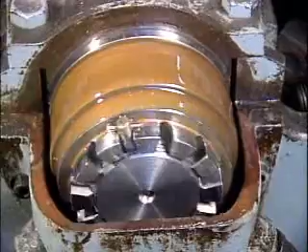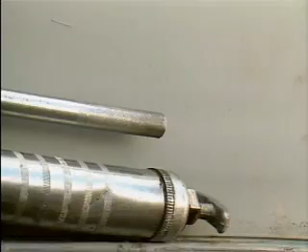A thin film of lubricant is the only thing preventing metal-to-metal contact between the many moving parts in your facility's equipment. If the lubrication fails, expensive machinery can be destroyed in seconds. One of the most widely used types of lubricating devices is a hand-operated grease gun.

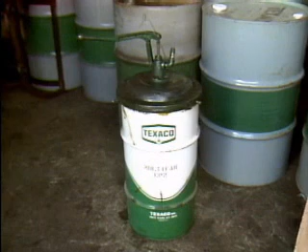Many grease guns can be filled directly from a drum through a fitting. These are called bulk load grease guns because they are filled directly from a bulk supply of grease. Grease is pumped into the gun with a device called a grease gun filler. The filler is often simply a hand pump that is installed on a grease drum.

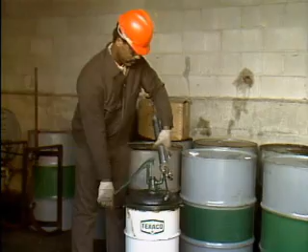The outlet of the hand pump is attached to the fitting on the grease gun and the handle is pumped. When you start to feel resistance to pumping, the gun is full. The cap should always be replaced. Other types of grease guns are filled by replacing cartridges.

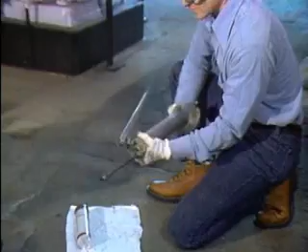The top of the gun is unscrewed, and then on this gun, a plunger at the end is pulled back and used to push the empty cartridge out. The plunger is pulled back and locked in position to make room for the new cartridge.

This new cartridge is opened by removing a plastic bottom cap and a metal pop top. It's placed in the gun barrel bottom first, and the top is screwed back on. To finish up, the plunger is released and shoved all the way in.

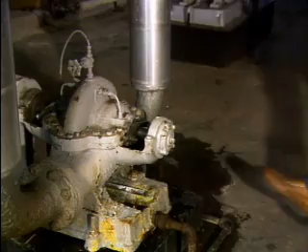Once a gun is filled, it's used to pump grease through a fitting into a machine part. Most of the time, that will be a bearing in a housing. Before lubricating a bearing, it's always a good idea to check it to see if it's running hot. The simplest way to do that is to feel the housing.

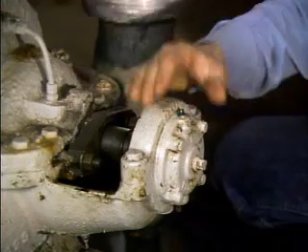You may want to try it with a glove on first. If it doesn't feel hot, you can check it with your bare hand. A hot housing is a sign there's too much friction, possibly because there isn't enough lubricant or the wrong lubricant was used. A hot running bearing should be reported for maintenance.

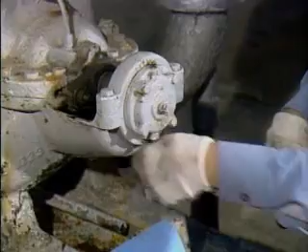Many bearing housings have a drain hole to let old grease out. The plug in the drain hole is unscrewed before new grease is added. It's important to use a clean rag to wipe off the grease fitting so dirt won't be pumped in. The tip of the gun is placed over the fitting and grease is pumped in.

On a bearing with a drain plug, the gun should be pumped until the old grease is forced out. In most cases, the new grease will be a slightly different color, so watching for a color change is one way to tell that the old grease has been forced out.

Sometimes, however, the old grease mixes with the new and it's hard to tell them apart. In that case, you may have to estimate when the old grease has been forced out by the amount that's come out. After adding grease, the drain hole is wiped off and the plug screwed back in.

If the bearing isn't turning during greasing, plant procedures may require the machinery to be turned on for a few minutes before putting the plug back in. That distributes the grease in the bearing and forces out any excess.

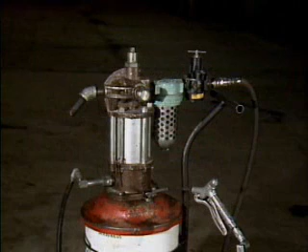Many facilities have pneumatic or air-powered grease guns. This air-powered dispenser consists of a pump that fits on a grease drum. An air hose connected to a source of compressed air supplies air to power the pump. The pump moves grease from the drum through a hose to a grease gun connected to the end of the hose. A trigger on the gun is operated to release grease.

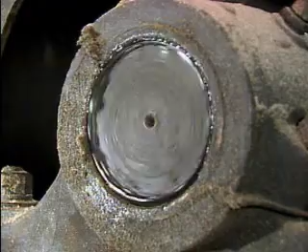Be sure to check your plant procedures when you're greasing a bearing. They may tell you how much grease to apply and whether the equipment needs to be running or not. Some bearings are lubricated automatically. This large sleeve bearing, for example, has no seals.

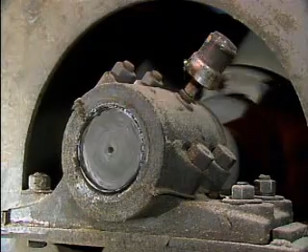Grease oozes out between the bearing and the shaft. On this bearing, the lost grease is replaced from a reservoir or cup. The cup slowly but continually feeds grease to the shaft through a hole in the bearing. A spring-loaded disc forces grease out of the cup and into the bearing.

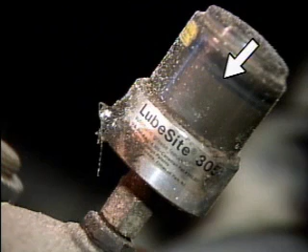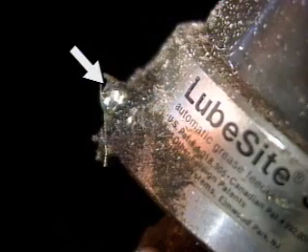Containers such as this one should be checked periodically to make sure they're not running low on grease. If the level in this cup is low, it's refilled using a grease gun. Some grease cups are operated by hand. Grease is forced into a bearing by turning the top of the cup.

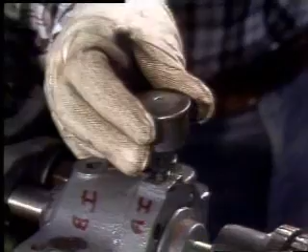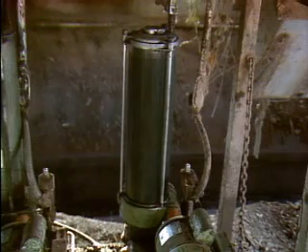Devices used to inject grease into bearings can be quite a bit more complicated than simple grease cups. These centralized lubricators, for example, contain hydraulic pumps that automatically supply lubricant to heavy machinery. The one on the right pumps oil, and the one on the left pumps grease. This is a simplified illustration of the grease system.

This is the cylinder that contains the grease supply. The motor and pump that force grease out to the bearings are at the base of the cylinder. A single line supplies grease to several bearing housings. There are two main things to check on this type of lubricator: lubricant level and lubricant pressure.

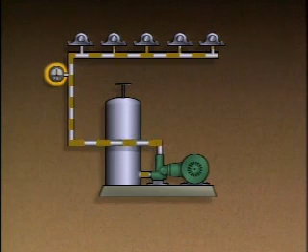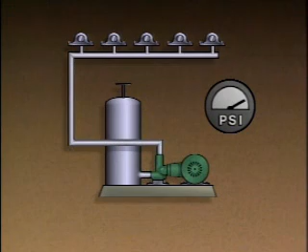On this unit, a level indicator shows how much grease is in the cylinder. A pressure gauge is installed in the grease line. If a blockage stops grease flow, pressure in the line will cause the gauge to read well above normal pressure. If the pump fails or the system runs out of grease, the gauge will read low.

The first step in lubricating a piece of equipment is to obtain the right lubricant. Moving parts can fail just as quickly from the wrong kind of lubricant as they can from a contaminated lubricant or from no lubricant. Once you've determined the right lubricant to use on a particular piece of equipment, you need to get it from storage. So next, we'll look at two ways that oil can be obtained from the containers that it's stored in.

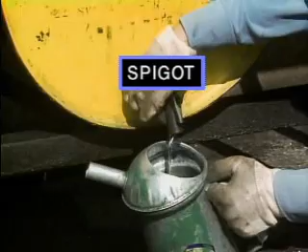Oil used in industry is often stored in large drums. One way to get oil out of these large drums is with a spigot. One type of spigot is opened by pushing down on the handle, which is spring-loaded. The handle closes itself when it's released, although it's a good idea to pull it tight so it won't leak. We've just seen a spring-loaded spigot, but there are other types of spigots commonly used in industry. Some spigots have a valve that is turned to dispense oil.

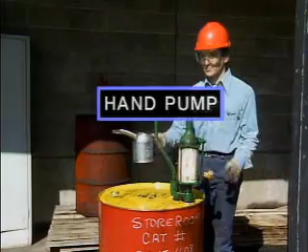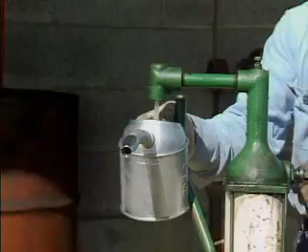Oil can also be drawn out through the top of a large drum with a hand pump. This hand pump has a drip collector that's pulled aside. The oil can is held under the spout. On this model, the handle is first turned one way to prime the pump, then turned back to pump oil into the can. When the can is pulled away, this drip collector automatically swings into position under the spout.

We've seen how to select the right lubricant for the job. We've also seen a couple of ways to dispense oil from large drums. In this part, we'll discuss some oil lubricating devices. We'll look at a drip feed oiler, some oil baths, and a ring oiler. Let's start with the drip feed oiler.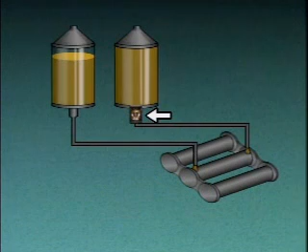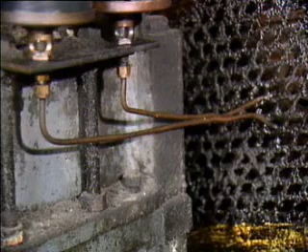A sight glass at the bottom of each reservoir can be checked to see if oil is dripping through at the correct rate. Most facilities have guidelines that specify what the correct drip rate should be. On this oiler, the drip rate is adjusted by turning a knob at the top of the reservoir. A lever above the knob is used to shut the oil flow off entirely. That's usually done when the device being lubricated is shut down.

The oil level can be checked by looking through the glass reservoir. If it's low, the reservoir should be refilled. Oil is added through a small opening at the top. The lid should be clean so that no dirt falls in when it's opened.

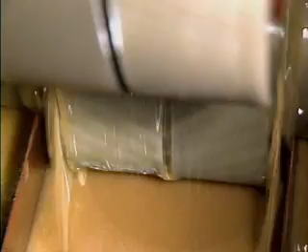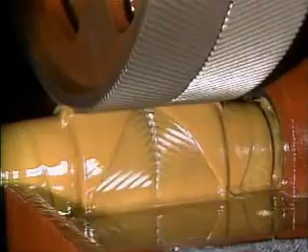Another method of lubrication, the oil bath, allows components to be partially immersed in a supply of oil. Oil baths provide oil for lubrication and also for cooling. In this example, a gear sits in a supply of oil. As the gear turns, its teeth pick up oil and carry it with them. The oil is transferred to other gears as they mesh with the one in the oil bath.

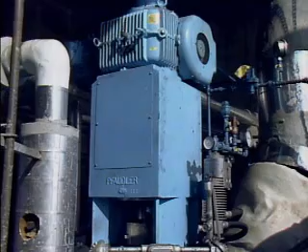Oil baths are also good for lubricating rolling element bearings. The balls or rollers pass through the supply of oil and carry the oil with them as they rotate. There's an easy way to check the oil level in many bearing housings and gear casings. This sight glass indicates the level of oil in a casing containing gears driven by an electric motor.

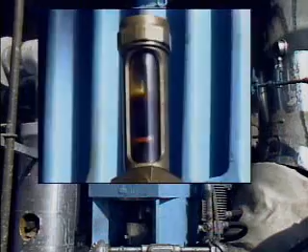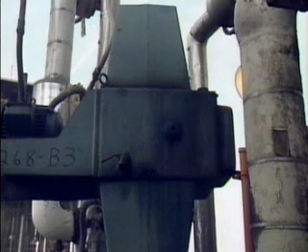The oil level in oil baths is usually different, depending on whether the equipment is running or not. So when checking oil levels in your facility, be sure you know whether it should be checked with the equipment on or with it off. The level in some oil reservoirs can't be checked when the equipment is running. That's because the oil is churned around so much that it's impossible to determine an accurate reading.

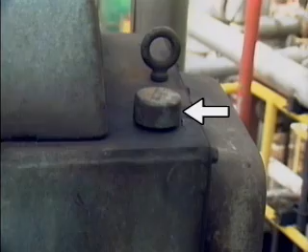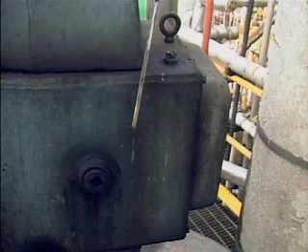In this large gearbox, for example, the oil level is checked with a dipstick. With the unit off, the dipstick is wiped off. Then it's pushed all the way back down into the oil and pulled out again. The level is above the low mark, so it's in the acceptable range. If it were at or below the low mark, more oil should be added.

When checking the oil level in any reservoir, it's also a good idea to check the oil's condition. If the oil has turned dark or feels gritty, it may be contaminated by dirt or products of oxidation. If water has contaminated the oil, it can acquire a milky appearance. It may be necessary to identify the source of the contamination before replacing the oil.

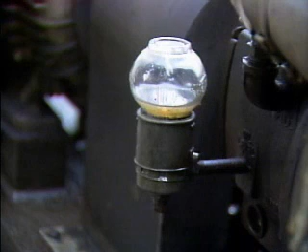The oil baths we've seen so far all use a gear casing or bearing housing as a reservoir for oil. But there are other types of oil baths that have reservoirs outside the housing. This one, for example, has a glass reservoir that automatically releases more oil into the bearing housing when it's needed. The open end of the reservoir sits in a cup, which is connected to the bearing housing by a pipe.

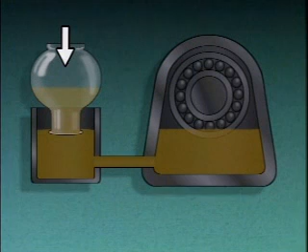As this illustration shows, the level of oil in the cup is the same as the level in the housing. The bearings are lubricated as they spin through the oil in the housing. When a small amount of oil leaks out of the housing, oil automatically flows from the bottle to keep the oil in the housing at a constant level. So this system is known as a constant level oiler. Another name for it is a bottle oiler.

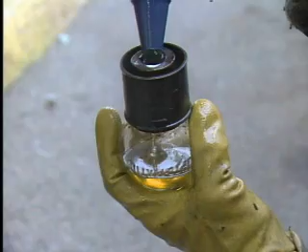The bottle reservoir should be nearly full. This one needs refilling. To fill a bottle oiler, turn it upside down and pour in new oil until it's full. Then put it back in the cup. The main thing to check a bottle oiler for is a faster than normal drop in oil level. If that happens, there may be a leak somewhere that should be fixed as soon as possible. Oil baths work well with gears and ball or roller bearings.

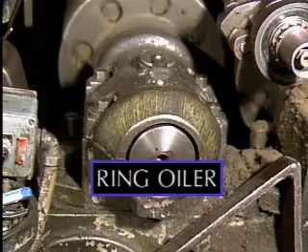Now let's look at sleeve bearings. Most sleeve bearings need a way to get oil in between the journal and the bearing. One way of delivering oil to a horizontal sleeve bearing is with a ring oiler. From the top, the oil ring is just visible under the oil filler cap. It's a bronze ring that rides on the journal.

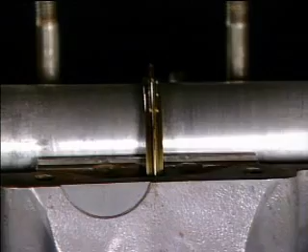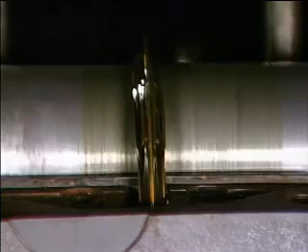On this partially disassembled ring-oiled bearing, you can see how the oil ring fits in a gap in the sleeve bearing. The ring is large enough to hang down into a reservoir of oil in the bearing housing. As the journal rotates, the ring turns with it. The rotating ring brings oil up to the top of the journal from the reservoir in the bottom of the housing. There's an inspection opening at the top of the housing.

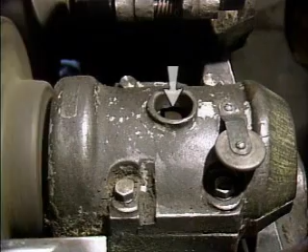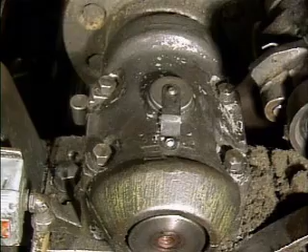The opening is used to observe the movement of the ring. The ring should turn smoothly. If it isn't turning at all, the bearing won't be lubricated. The opening is also used for adding oil to the reservoir. The oil level is checked through a flip cup on the side. The oil level in this unit should be halfway up the cup.

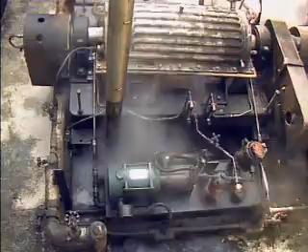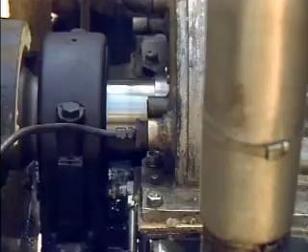In some lubrication applications, gravity or the rotation of equipment can't supply enough oil. In these cases, a circulating oil system driven by a pump is used. This piece of equipment contains a heavy shaft that spins at very high speed. Each end of the spinning shaft is supported by a roller bearing in a housing. Each bearing is lubricated by a system that circulates oil through it. Let's look at a simplified illustration of this system to see how it works.

Here is the shaft, and here are the bearings. The pump for this circulating oil system sits on a tank called a sump. The sump holds the oil supply. An electric motor drives the pump. The pump draws oil out of the sump and sends it to a filter. The filter removes dirt and metal particles worn from the bearings. A gauge indicates the pressure of the oil.

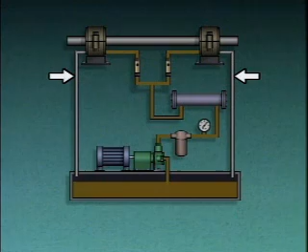The oil then passes through a cooler. From the cooler, the oil flows to a T, where the flow splits to go to each of the bearings. A flow indicator in each line shows the flow rate to the bearings. Oil enters the bearing housings, lubricating the bearings. The return lines carry the oil back to the sump.

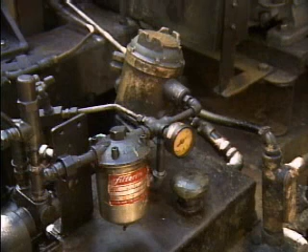Your duties on a system such as this will probably include checking oil pressure, flow rate, and oil level. In this system, oil level is checked with a dipstick located under the sump's filler cap. You should also check for leaks in oil lines and bearing seals.

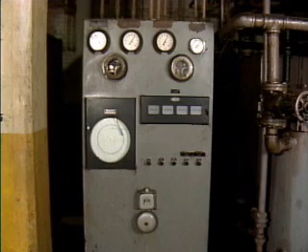For large systems, you may have a panel with gauges that indicate oil pressure and temperature. There may also be alarms that indicate system malfunctions and low oil levels.

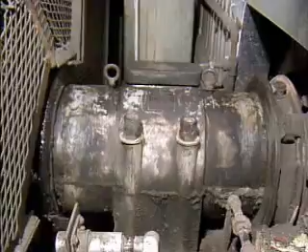Most bearings are enclosed in housings. In addition to supporting and protecting the bearing, the housing also serves as a reservoir to hold the supply of oil or grease that lubricates the bearing. With most bearings, the opening where the shaft leaves the housing is sealed to keep lubricant from escaping and contaminants from getting in. Probably the simplest type of seal is a contact seal.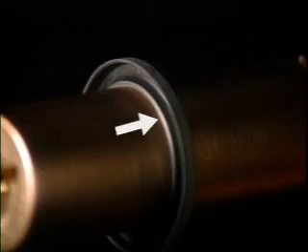It's usually made of a relatively soft material, such as felt, synthetic rubber, cork, or a synthetic material such as silicone. This model shows how the inner rim of a contact seal fits on a shaft. This illustration shows how the outer rim of a contact seal fits tightly in a bearing housing to keep lubricant from escaping. The inner rim, or lip, presses against the spinning shaft.

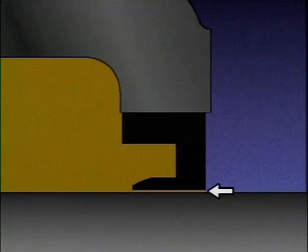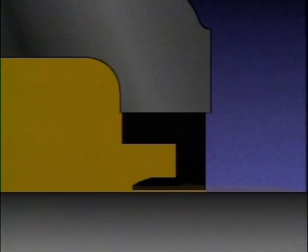A seal in good condition will allow only a very small amount of lubricant to seep between the lip and the shaft. The lubricant reduces friction between the seal and the shaft. The lip on a contact seal will eventually wear down, however, allowing lubricant to leak out at an unacceptable rate. For this reason, checking lubricant seals may be an important part of your duties. Any seal allowing a noticeable amount of lubricant to escape should be reported.

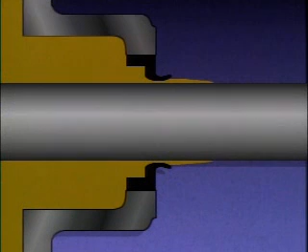Contact seals used with grease can be damaged by over-lubrication. Excess grease will be forced out under the lip. This can deform the seal and allow even more grease to leak out. If too much grease leaks out, the bearing could fail. So lubricate bearings with contact seals carefully according to your plant procedures.

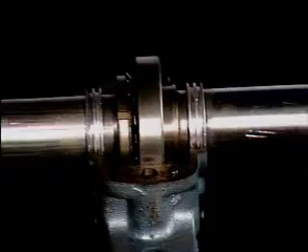Another type of seal is a labyrinth seal. A labyrinth seal consists of two sets of interlocking metal ridges. In this particular design, one set of ridges is attached or built in to the bearing housing. The other set is part of a ring that fits tightly on the shaft. As this illustration shows, the narrow gap between the ridges is like a maze or a labyrinth. That's why this type of seal is called a labyrinth seal. Both the twisting path created by the ridges and the small clearance between the ridges restrict flow.

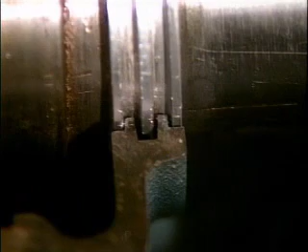While both labyrinth seals and contact seals are used to help restrict the flow of lubricants, they can't be relied upon for all fluids and in situations where it's necessary to virtually eliminate fluid flow. For example, when hazardous fluid is contained in a housing, even a small amount of leakage would be undesirable. To minimize fluid leaks in these situations, another type of seal called a mechanical seal is often used.

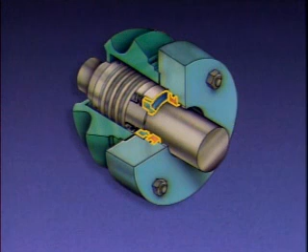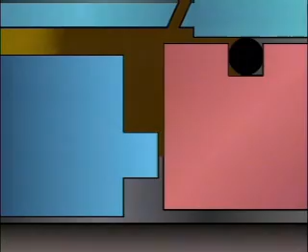To prevent the seal rings from being damaged, some type of lubricant must be supplied to them. In some applications, the process liquid is used as the lubricant. In other applications, an external liquid may be used to lubricate the seal rings. The external liquid is sometimes referred to as a seal flush. Here is a line that supplies external fluid to a mechanical seal.

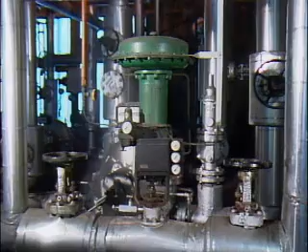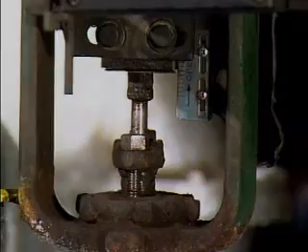To keep process fluid from leaking out along valve stems, the stems of many valves are sealed with packing. Valve packing is frequently a rope-like material soaked with a lubricant such as oil, grease, or powdered graphite. The lubricant reduces friction between the packing and the valve stem. The packing fits snugly around the valve stem. The motion of the valve stem can gradually wipe away some of the lubricant where the stem contacts the packing. If that happens, the valve may start to stick.

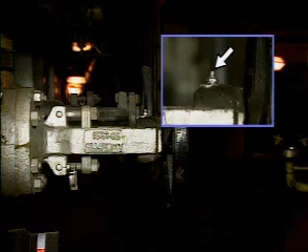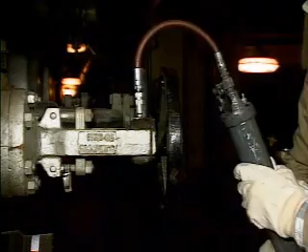To keep that from happening, this valve has a fitting that allows grease to be pumped between the packing and the valve stem. After wiping the fitting to prevent contamination, the worker uses a grease gun to apply grease. Your facility procedures may specify how much and what kind of grease to apply. After the grease gun is removed, excess grease is wiped off the fitting. This prevents dirt and other contaminants from sticking in the grease and collecting around the fitting.

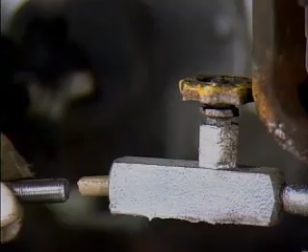Another method for applying grease to the valve stem is with a lubricator. To apply the grease, the bolt on this lubricator is screwed in until the grease in the lubricator is pushing against the valve stem. In this topic, we discussed how seals restrict leakage and how valve packing can be lubricated. Take some time now to try a couple of practice questions.